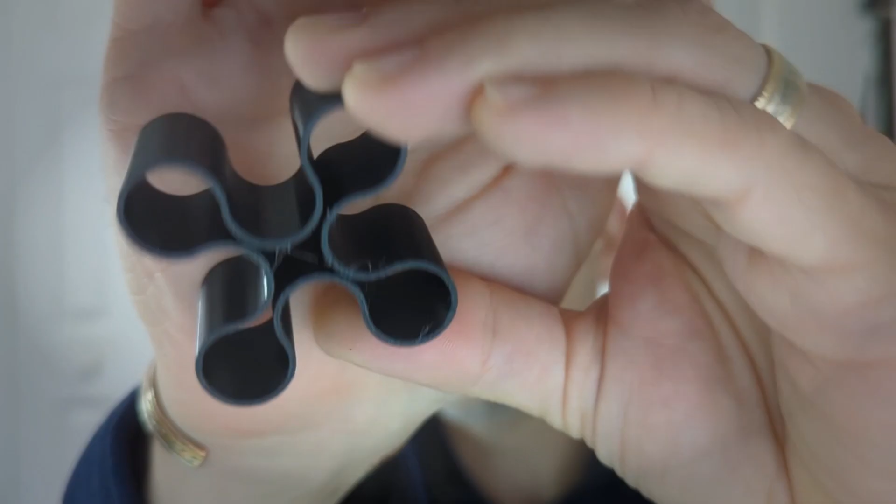Hello, today I want to make a 3D printed pen holder. I saw this unique design on the internet, and I'll show you what I printed here. This is a pretty cool looking 3D printed pen holder.

You can see the layer lines in there, and that gives it a little extra. I'm going to build the next one a little bit taller, at 50 millimeters, but with a 14 millimeter inner diameter. This will sit on your desk, like that.

So let's get started on building this pen holder. I have a PDF open right now. Feel free to take a screenshot of this, and I will build it from these dimensions right here. These seem to work good. This is basically going to be 2 or 3 layers of the 3D print, and when it's printed, you can see those lines, each individual line as it grows up inside of here. It's pretty cool.

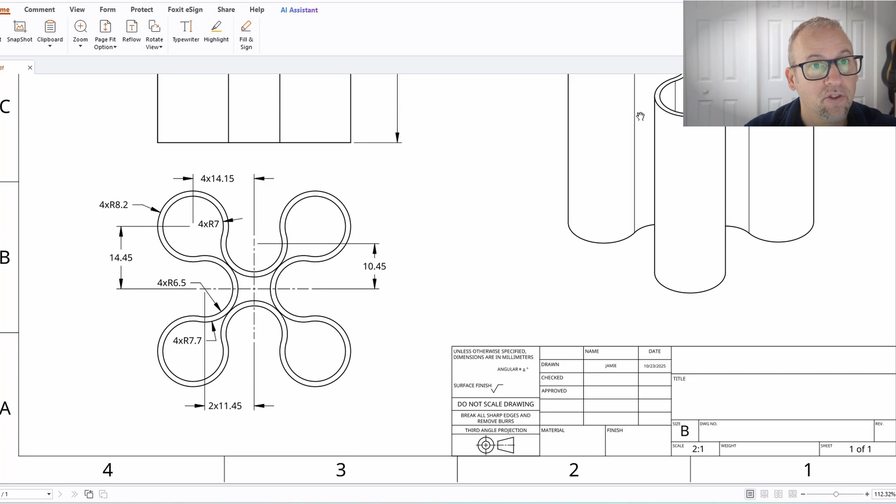So let's get started. I'm going to open up my OnShape now and throw this PDF on my second screen. I am using OnShape, and this is a free subscription. I'm going to go to Create here, Document. We're going to type in pen holder.

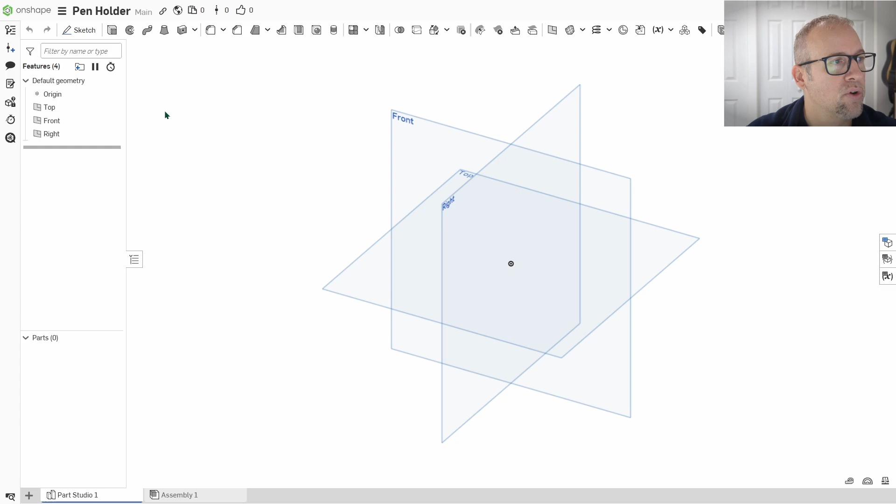And we are going to start on the top view here. So we can hide the front and right views. Let's go here to front, click on that, right click on the little eyeball. And then we're going to grab this view cube and pull it in. I'm going to click on my top view.

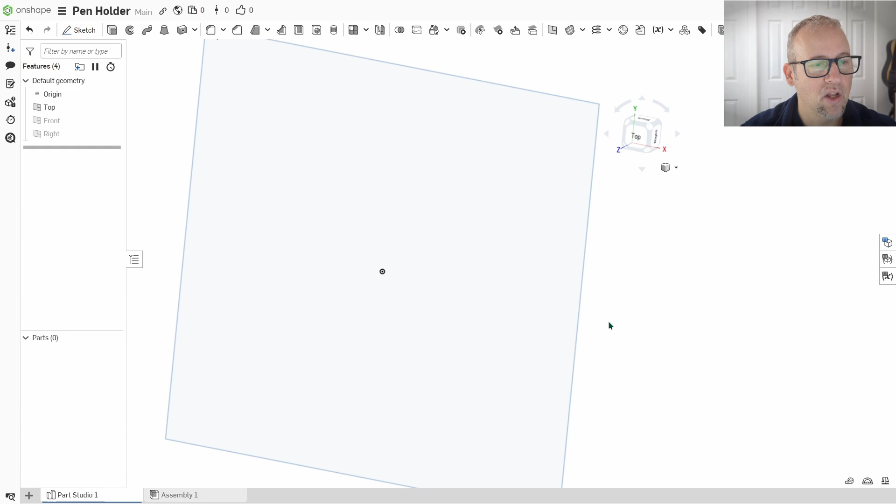Okay, move this over. I'll give you a quick explanation of what the mouse does. Your middle mouse button does zoom in and out. If you hold down the right mouse button, it will do a rotation. And if you hold down the middle mouse button, the scroll wheel, it does a pan. Let's go back to the top view.

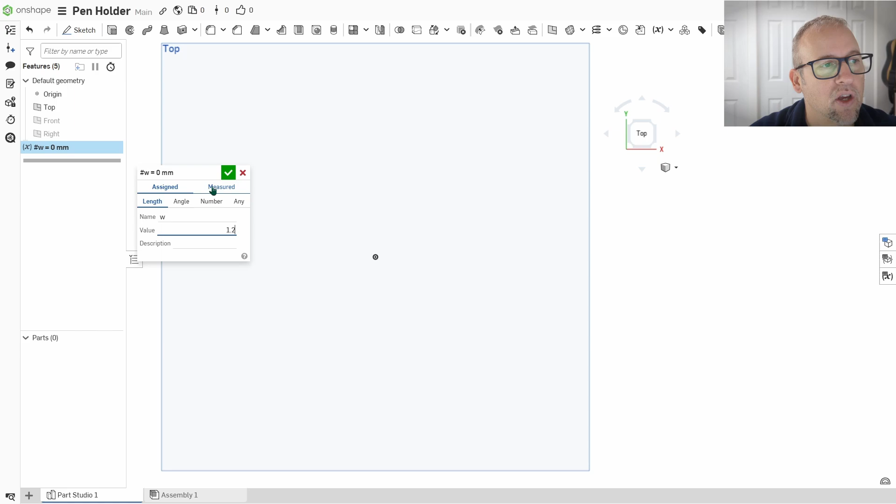Now I'm going to create a variable. Over here is variable - if you can't find it, just type in VA, and there it pops up. So we'll click on that, and we're going to name a variable. Name is going to be W for width, and it's going to equal 1.2. This is the width of the shell - we get that this dimension right here is the width. I'm going to keep that as a constant, so you can adjust this very easily. You see that includes that variable right there - that's like a global variable for this particular document.

So let's go to sketch, and we're going to sketch on this plane right here, the top plane, and go with a circle over here. We're just going to drop the circle here, and once we left click outside of that, we can type in 14. If it didn't work, you can just double click on there and adjust that, type in your numbers. Okay, and the second circle I'm going to make 13. I'm going to put that about right here.

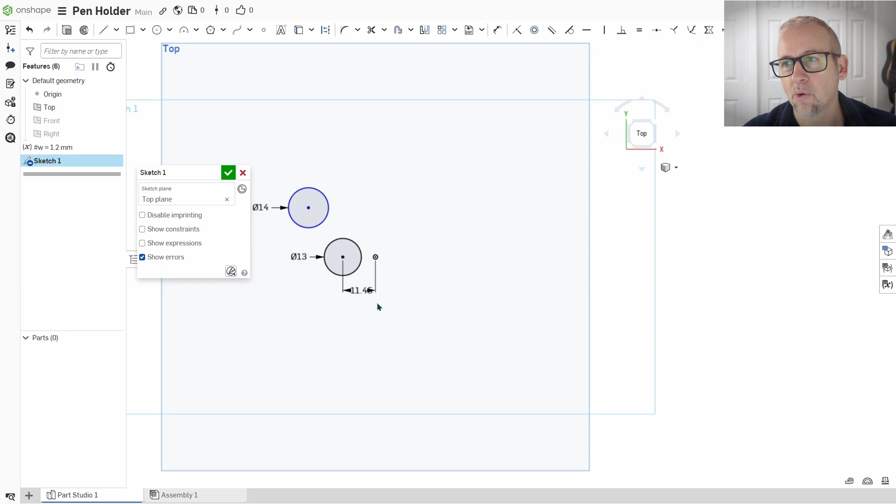13, enter. Now we can do some positioning of this. We're going to hit D for dimension right here, and go from this origin to this point right here, and type in 11.45. Then this is actually horizontal with this - so I'm going to click here, and actually undo that. We're going to click here and say it's horizontal, so it's exactly horizontal with that. Next we're going to do 14.15 from center to here. And now we're going to do the 14.15 to here.

All right, so now we're going to create an offset. We're going to offset this face right here, and click on this little 5 right here. We're going to type in W, and then it knows that W is a variable of 1.2 millimeter. Green - let's hit enter and left click to confirm that.

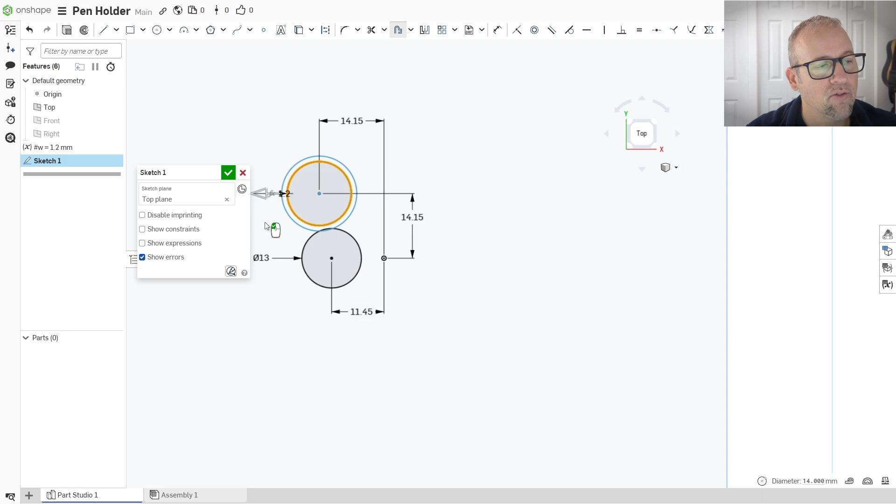Hit escape a couple times to get out of that. All right, so let's create one more offset. Right here, double click on that 5, W, enter, left click, left, enter. Like multiple sequences, but yeah, we finally got it done.

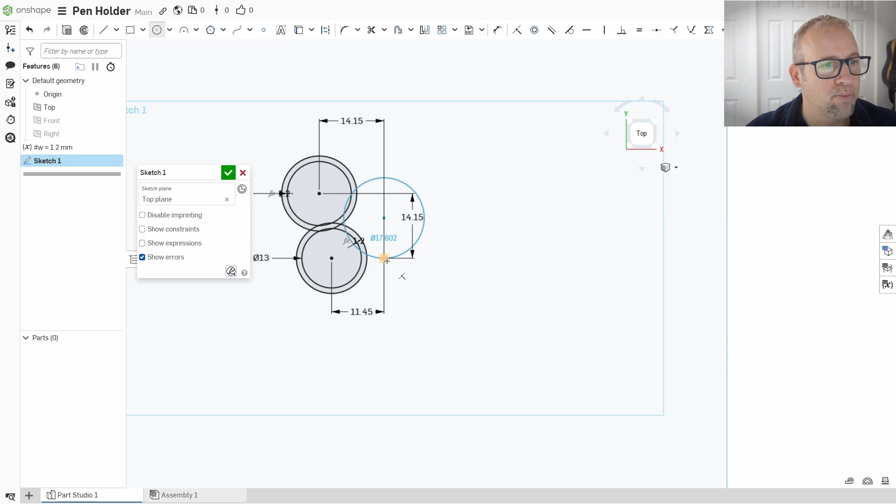So now what we're going to do is create one more of these, and that's going to be 10.45. It's going to carry on that 13 millimeter diameter. So one more, we're going to go straight up from this point right here, right there. And then we're going to do 13.

And then we're going to create an offset on that guy. So let's go over to offset. We're going to do that right there. Click on that 5, double click on the 5. Hit W. Enter, left click.

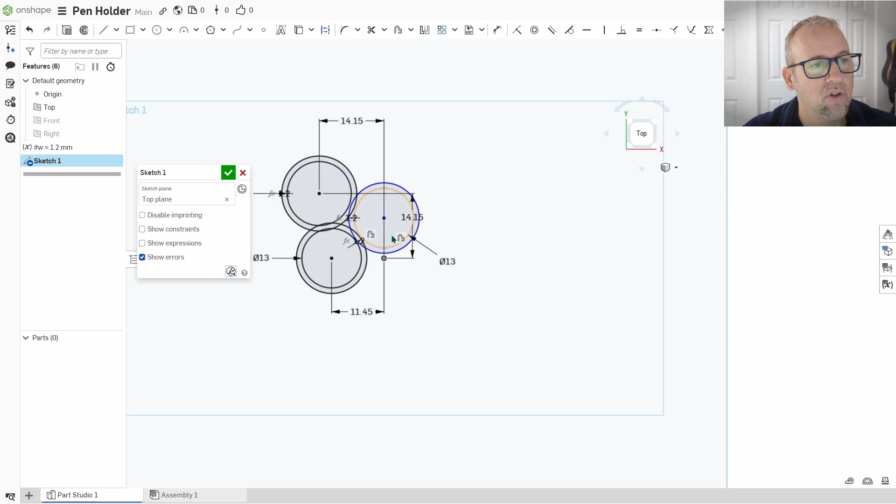Okay, now we just need a dimension that ties that, locks that into place. So let's click on this dimension, go from origin to there. This is going to be 10.45. Didn't take. Okay, 10.45, green check. We're going to type in 10.45.

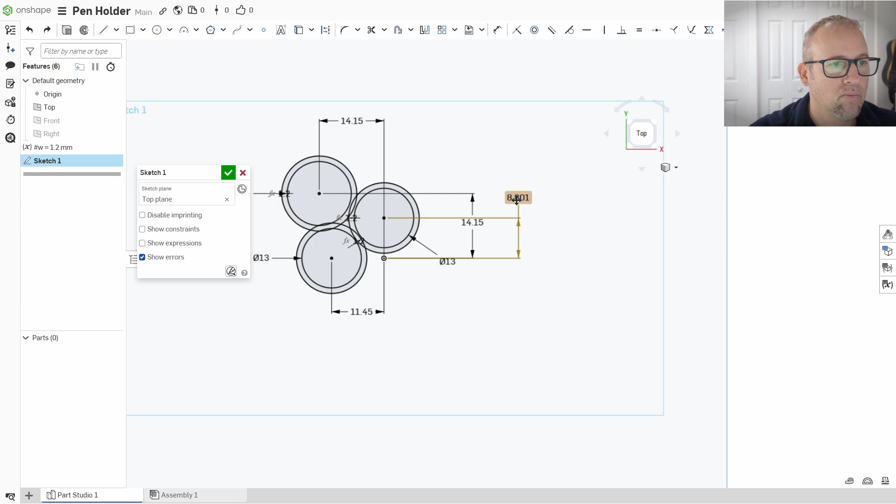There we are. Now that we've got our 3 circles done, we're going to create some lines up here and a line over here. So we're going to create one vertical line and one horizontal line. Those lines will assist us in trimming this guy down.

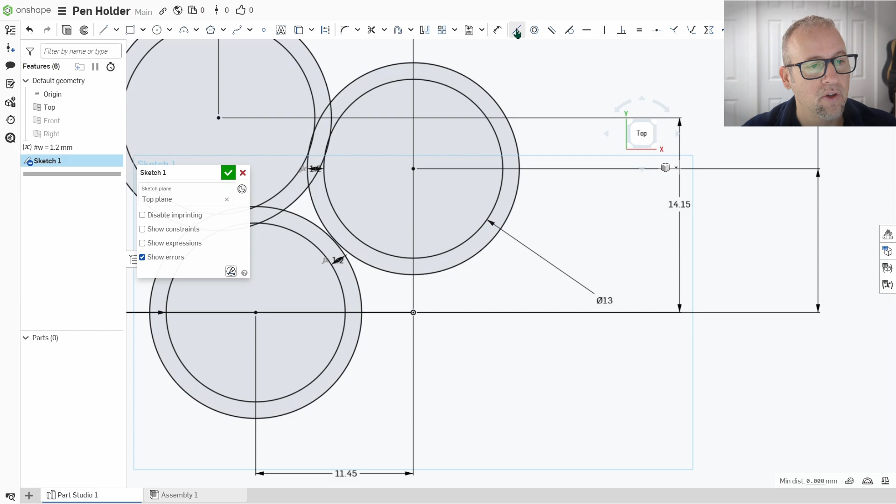So we want this perfectly horizontal, but we want it on the origin. It's not on the origin currently, so let's escape out of that. See, that's blue. What I'm going to do is click on this point right here and click on that origin point right there and put this coincident right there. Snaps it to it, becomes black. Black is fully constrained.

All right, now we do another line straight from the origin straight up. Just has to be past this line right here. And left or right click escape line, or we just hit escape to get out of there.

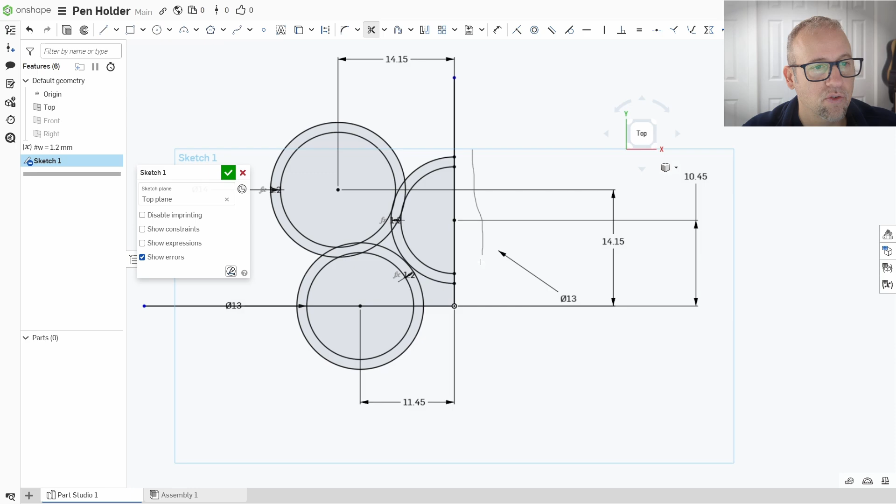Now what we're going to do is trim some of the outside. So let's go over to the trim right here. We're going to just trim right down, trim right over like that. And we know that we don't need these two, we don't need these two. And we'll clean this up a little bit here.

All right, so now we're going to go in and we're going to trim these inner areas. Let's go with where's our trim? Trim right here, little scissors. We're going to grab this here, grab that, trim this guy, and trim this guy. And now we're looking here. So we're going to trim that guy and trim this.

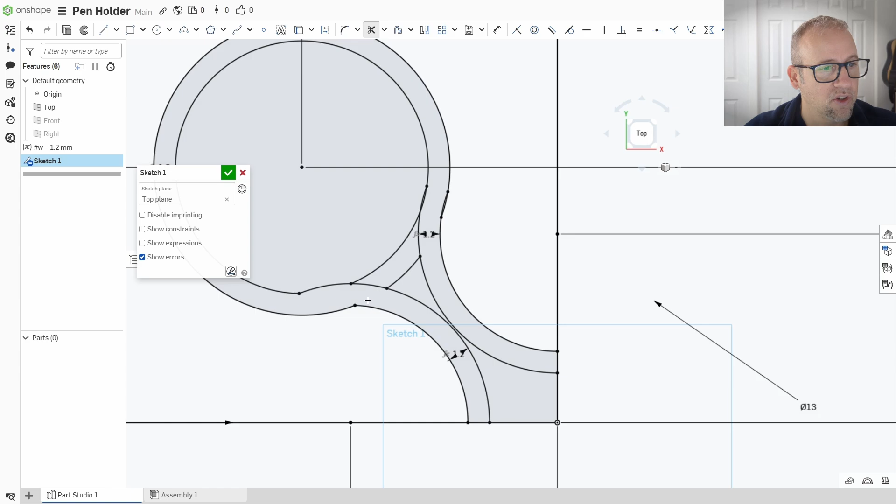And we're going to do some blends, or we're going to do some tangency things here. So let's clean that, remove those two. Then we will remove this one and this one, not that one. Control Z to undo the last one. There we are, so that's how it's going to look, but we're going to do some tangency now.

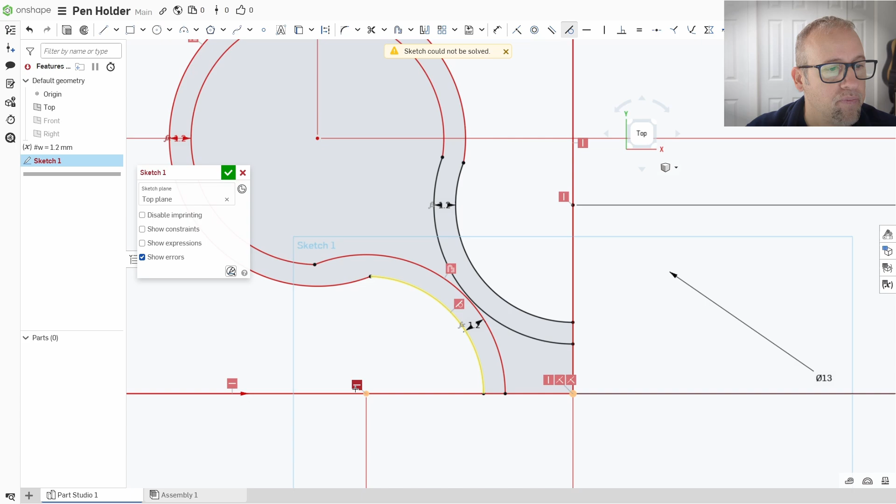Click on tangent, this guy to this guy. We're going to click on this guy, we're going to delete this guy. Okay, so it fixed it. It moved it a little bit, so that center is off a little bit, but we cleaned that up.

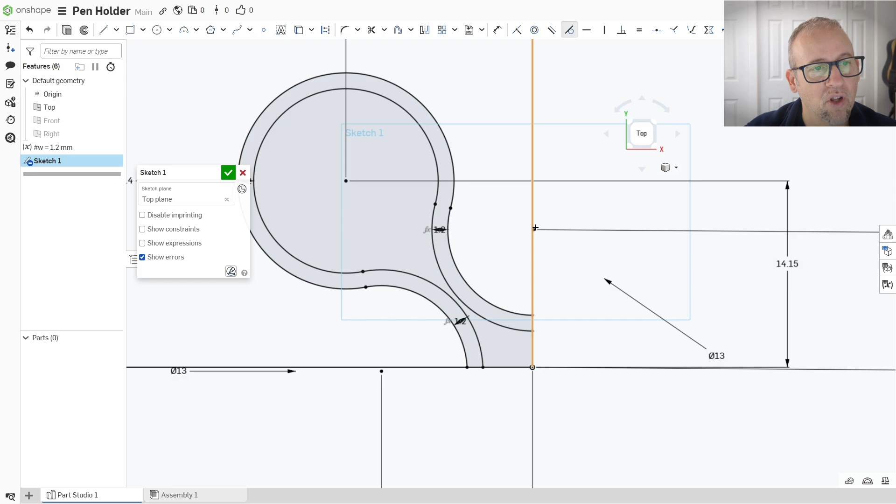So now we're going to do tangency on this one, this one. Let's make sure that's checked. Click here, and I'm going to get rid of this one. Okay, so it's moving it slightly off just to make it tangent, which should be fine.

We're more concerned about the general shape. Okay, and everything actually looks great. So it moved that center point down of that circle, which is fine. Because we want to have it separated right here. Let's finish the sketch.

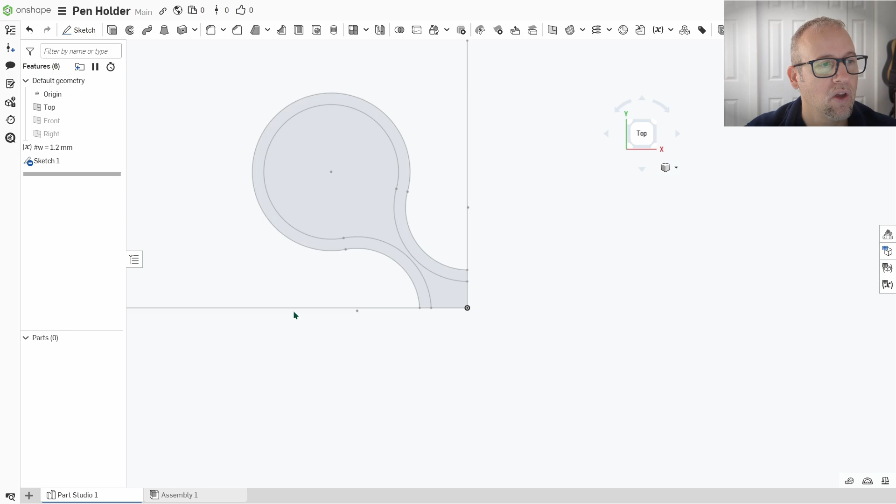Now we're going to do an extrusion of this right here. So we're going to go to extrude, click on this outside edge, not the inner edge. See how the orange lights up? We want the outside to light up. We're going to rotate that holding down our right mouse button, and I'm going to move this 50 millimeters. If you wanted to close this off, you could do that too, but let me finish this first.

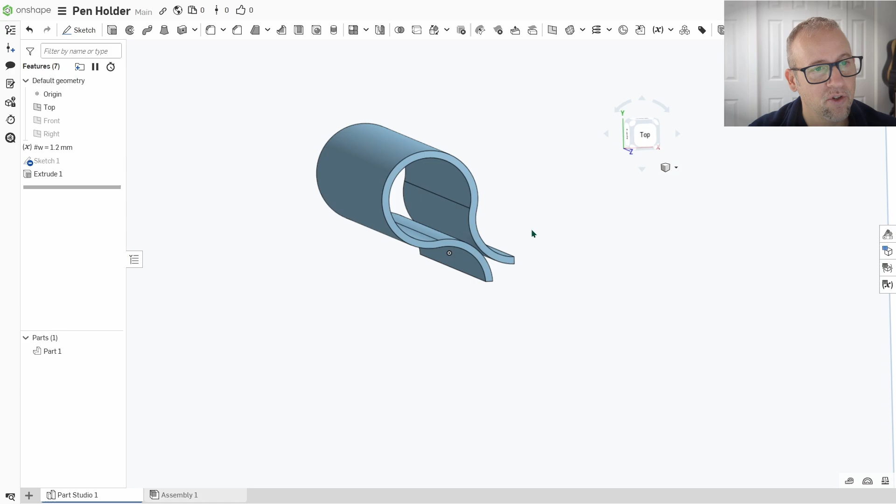So here's how I make the first piece, and what I'll do is mirror this, and then we'll show you how to close off everything. Let's go mirror this. We could hide this top view now - go to the eyeball, click that, it hides it. And we're going to mirror about this plane right here.

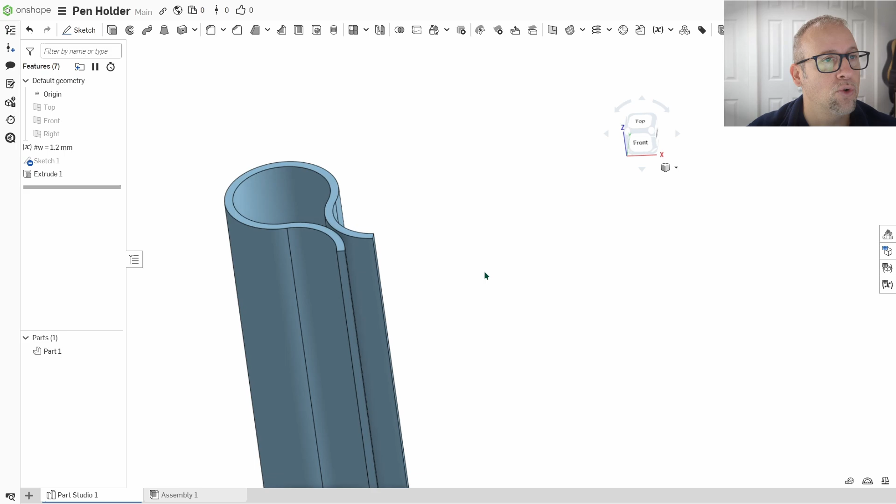So then we'll make it 4 pieces. Let's go to mirror, and click on our entity to mirror - that's that guy. Mirror plane is this guy. Green check. It's going to add to part 1, which is great. That's what we want - there's no separation in there. That's exactly what we want.

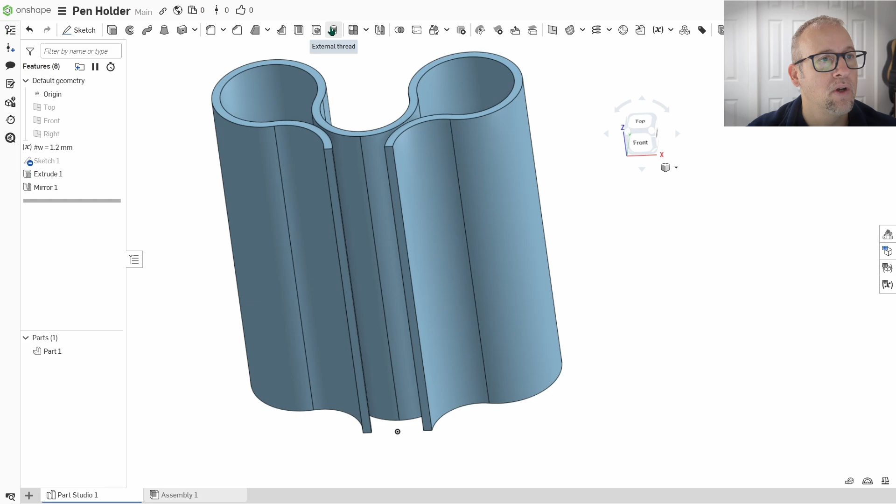So now we will mirror that one more time. Let's go to mirror. I'm going to click on this guy, and we're going to mirror about this plane right here. Green check. There's our pen holder.

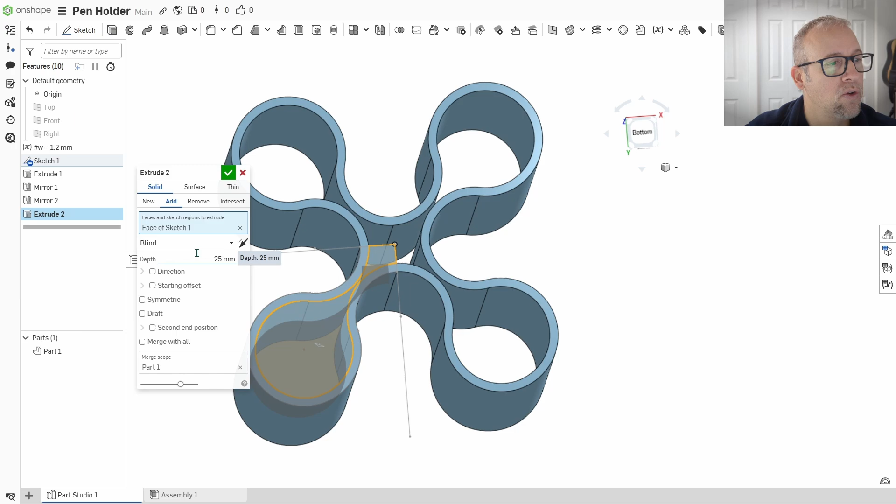Now to fill this, we're going to go to our original sketch, and look down inside of there, and extrude this surface right here. Remember that inner surface we said we weren't going to do? Now we're going to do that. So 25 millimeters in, and let's put a green check. So we see that filled it and it combined it - it unioned it together.

All right, if you want this to copy, you just grab this and pull it up before the two mirrors, and it mirrors that function. Okay, let's rotate around. All right.

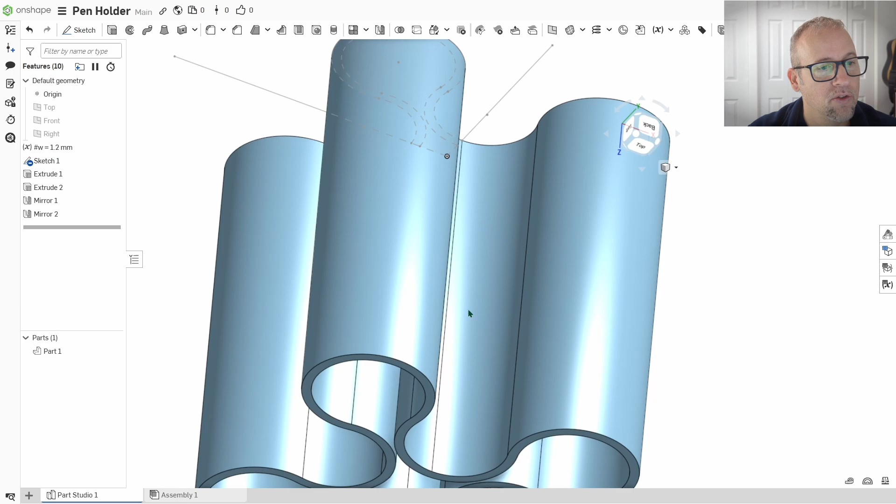So now we're going to export this out. Left click, right click. Let's go to export, and we want to export this out as an STL. So we'll call this pen holder, STL, download, export. There we go. Now we just got to wait for that to export.

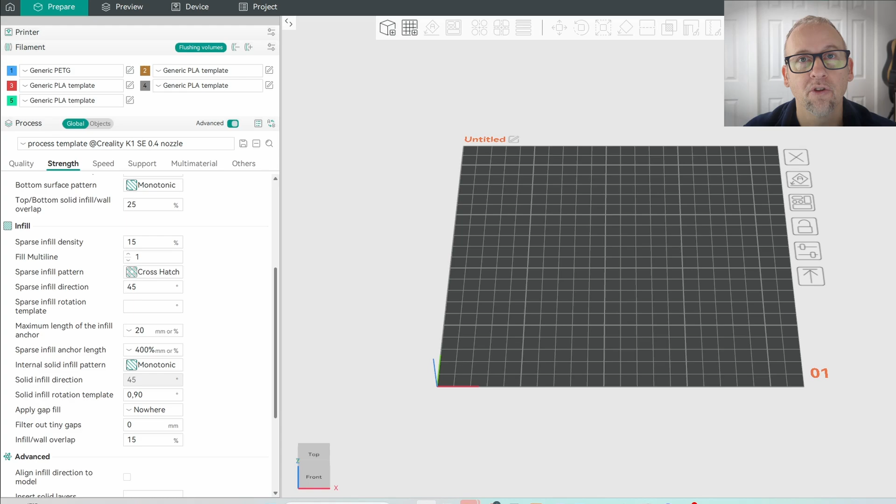I'll open up my Orca slicer now. I have my Orca slicer open. I will go grab my pen holder and drag and drop it in. Okay, and now we'll figure out what material you want.

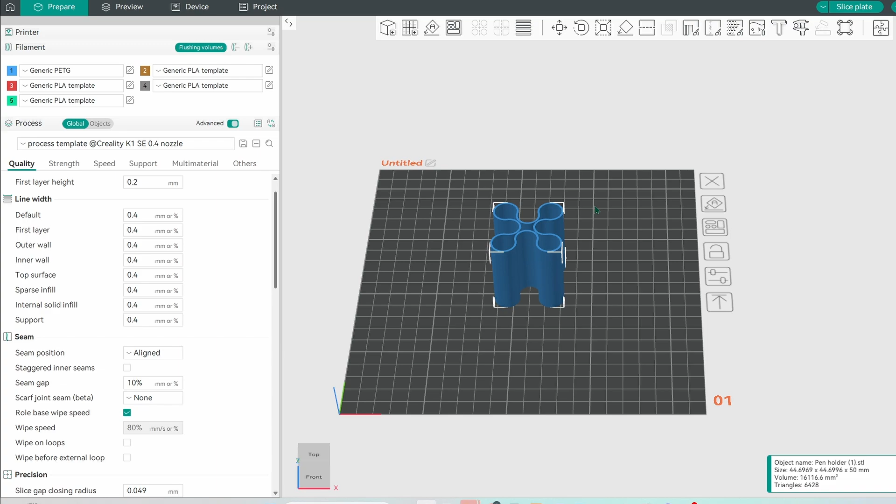I currently have PETG in my printer right now, and just do two walls. I'll keep everything about the same. I don't think infill even matters with this because we're trying to do this almost in vase mode, but it's not actually vase mode. But it's going to look nice and pretty clean when it's done.

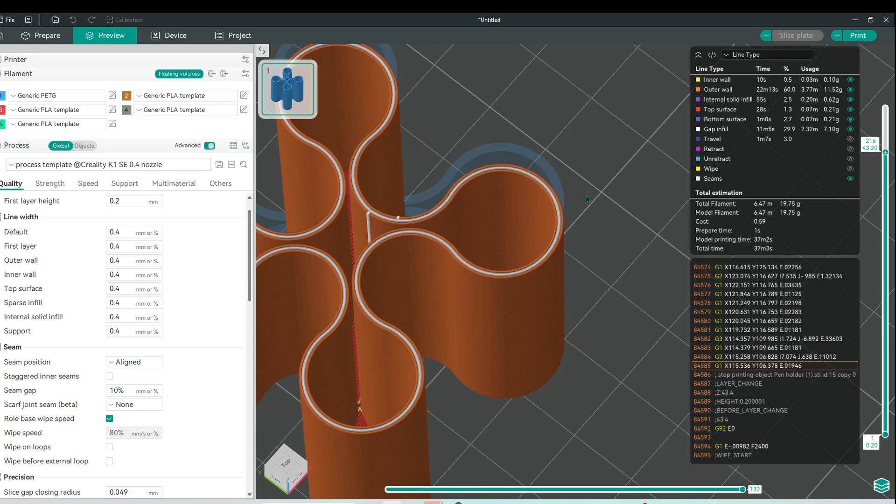All right, so now that we did our slice, we can take a look at this and scroll through here and look at the different layers and see how this is going to cut. We see our seam - this is our inside seam, which is a great location because it won't be very visible. And then another seam is on the outside, which I think is just fine. If you wanted to try to hand draw a seam, there is a possibility to do that.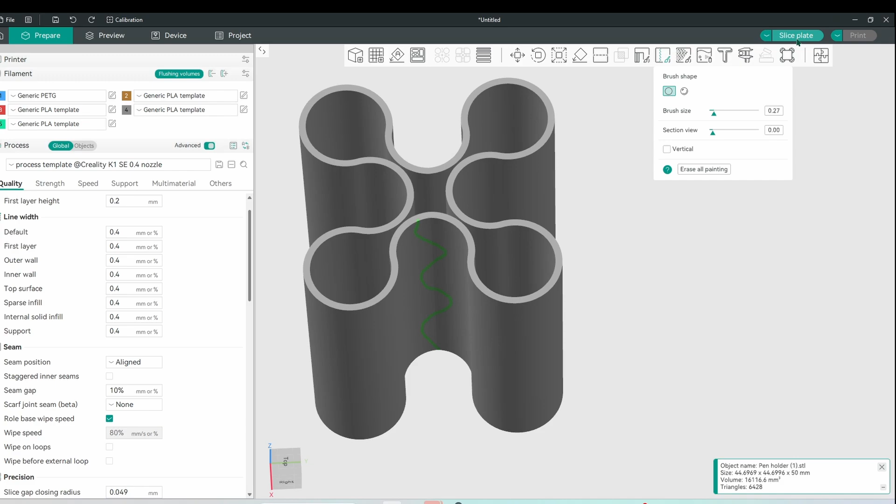Let's go to prepare. We can tell it I want seam painting in this area. You can make a little design out of this too. So let's go, and we're going to do just a little zigzag pattern. Okay, simple. And then section view, and it should follow that new seam that I made - so you can see that. That's pretty cool, it's a little unique characteristic to it.

All right, so then when you would show it to somebody, you would be shown this way right here, and you can see all those lines, and they look really nice. So let's kick this off to the 3D printer. This is going to take 36 minutes to complete, and it's going to cost me 60 cents to make.

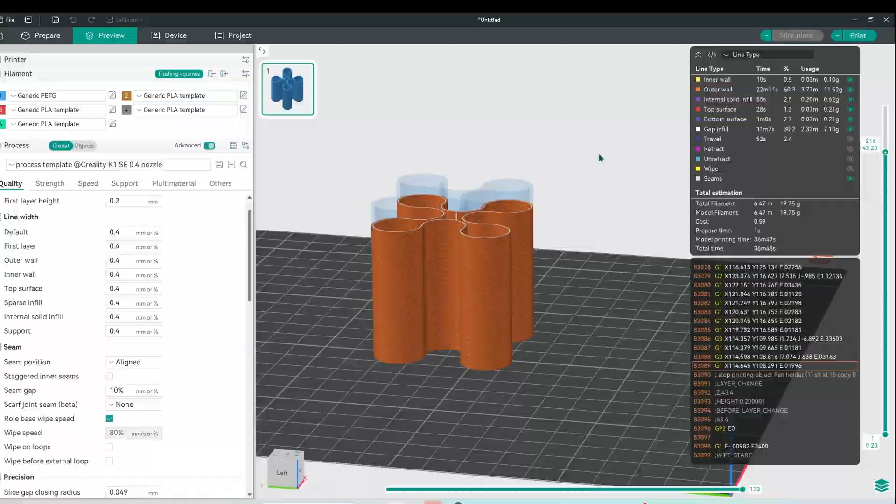So here's my 3D print. Okay, this is a shortened version of it, but this one has no stop to it. I decided to print this real quick and see how it was going to function, and it works great. With this pen, I may want to tighten it up a little bit, but it does work. It sits about like this on my table, and if you want to add the layer on the very bottom, of course you can do that too.